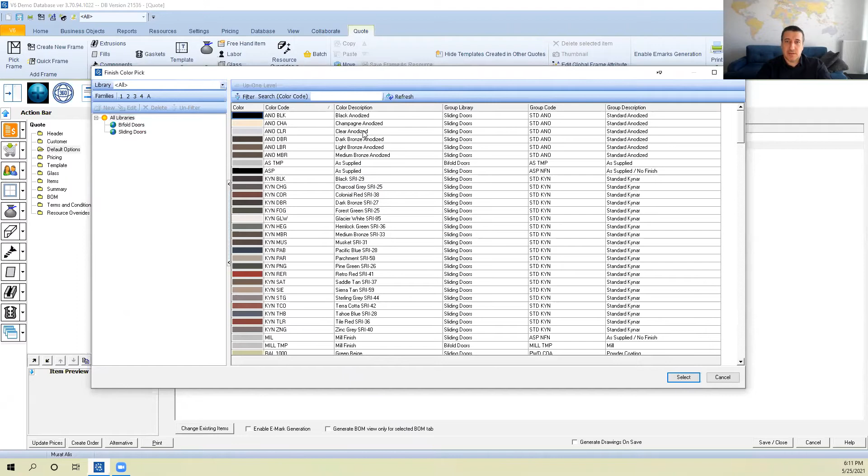I can pick a salesperson from here, within our organization, who is doing that job. We can pick finish options, global finish options for our frames. V6 supports all types of finishes - anodized, clear, champagne, bronze, and some Kynar finishes, all the powder coating options with the actual colors. When you pick those finishes, it will affect your actual pricing as well, not only visually.

And the same way, we can also pick a glass, and we have our own glass library with different glass thickness. You can build your own library in V6.

I'm going to start with the actual sliding door here. These macros are shortcuts to add quickly elevations, so I'm going to add an elevation. It's going to be a 4-panel elevation, overall 135, and I want to put a screen. This is the suggested configuration for that item. I click OK, and it's going to build dynamically that elevation.

So this is my elevation. You can see the price automatically calculated at quote time with the default options picked, and I can change those options. I can configure my door again with different track types, different head track, different seal track, different style and top rail, and so on.

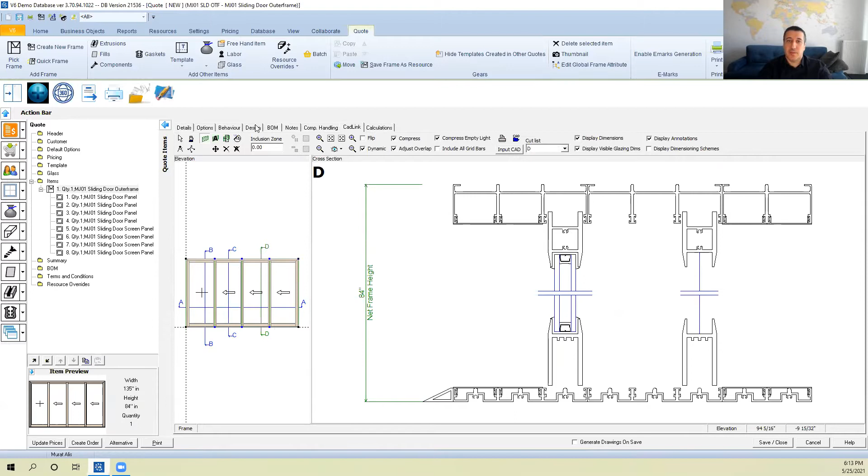Then I can show you the bill of material. This is the list of all the extrusions used in that item. We have the length, cut angles, quantities, and also finish and part numbers. This is the vendor that I need to buy the profiles from. Then a list of components - we have just 3 test components here, with the actual quantities. This cost and price we can hide if you don't want to show.

And this is the glass. You can see there's only one size of glass, and the reason is the system is set up to be automatically equal glass size. So even if you change the width or height of the frame, the glass size will remain unique within all those panels.

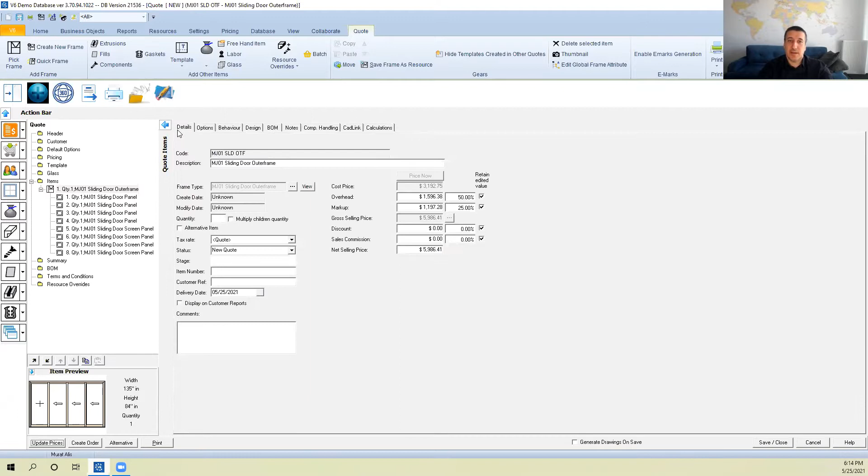Now this is my elevation, and you can see this is the price being 5,986. If you change here and do 145, dynamically the model will update and the price will become over 6,000 now.

And if I do a 3D view, you can see that actually this is the presentation of that - the actual profiles in there.

Now, if I want to do a change on this, I can click this button and say the top rail - I want to move that one to make it a bit bigger. And I want to do the same thing for the fixed top rail, the bigger ones. If I click OK, you can see right now the picture updated, and we have the bigger top rails here.

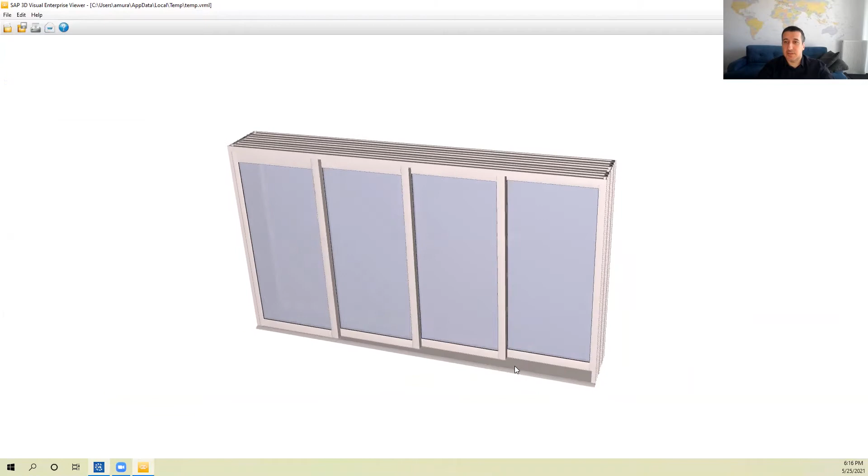And actually, the price got updated slightly. The bill of material automatically updated, and also the 3D view will have now the bigger top rail here - you can see that. So the important thing to note here, Murad, is anytime we make changes in real time, it's calculated and captured by the software engine to update in real time, correct? Exactly.

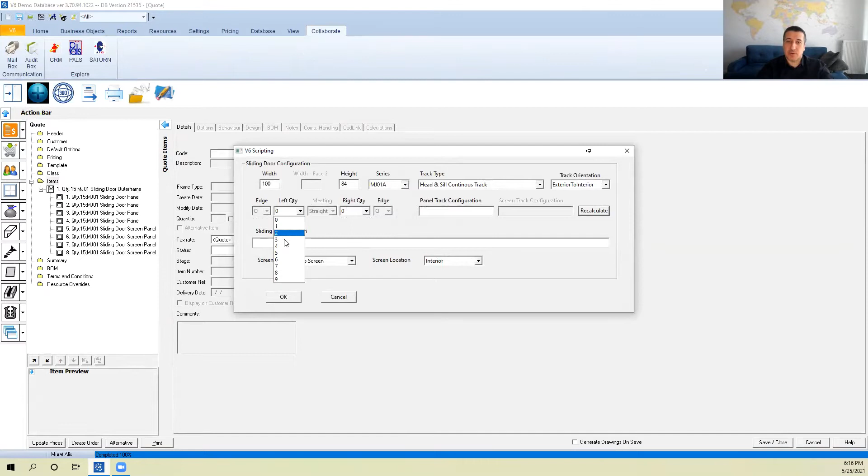And now let me add, we can put some volume to this. Let's say this quantity will be 15. I want to add another one, so I click this button. This time I will do a corner item, let's say it's going to be 3 by 3 and 90-degree corner.

90 and maybe 100, a different size here. And I can put a screen again, maybe a slim screen this time. So this is my configuration, so I click OK.

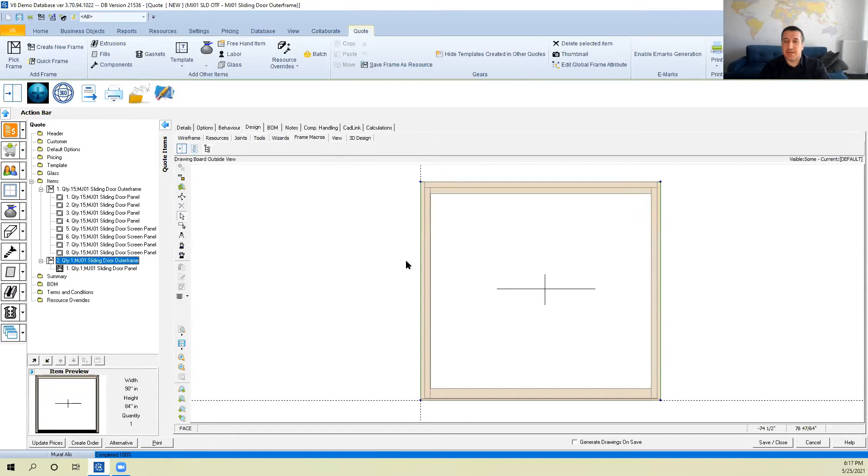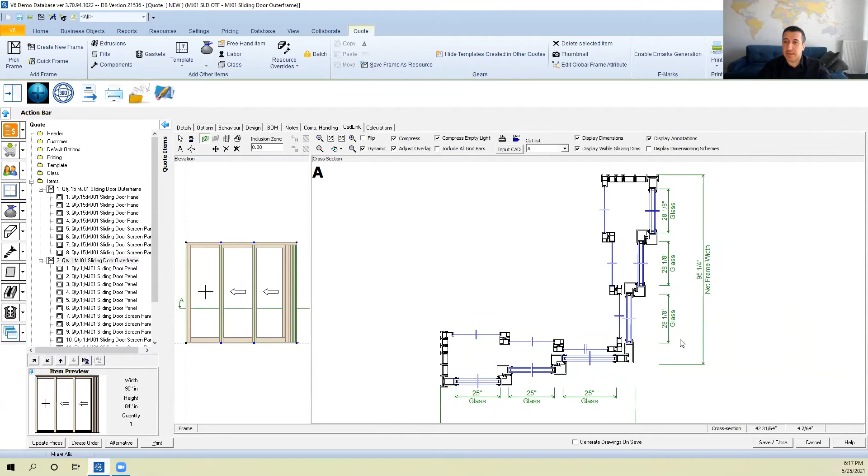And this time it will be, and we can understand better, like it's 3D now because it will be the actual corner. So it will do a small model of that building, of that frame. If I show you that, the rotated view, this is what we have. And if I do a cut, you can see that. This is how things are coming together. And again, it's equal glass automatically in each face.

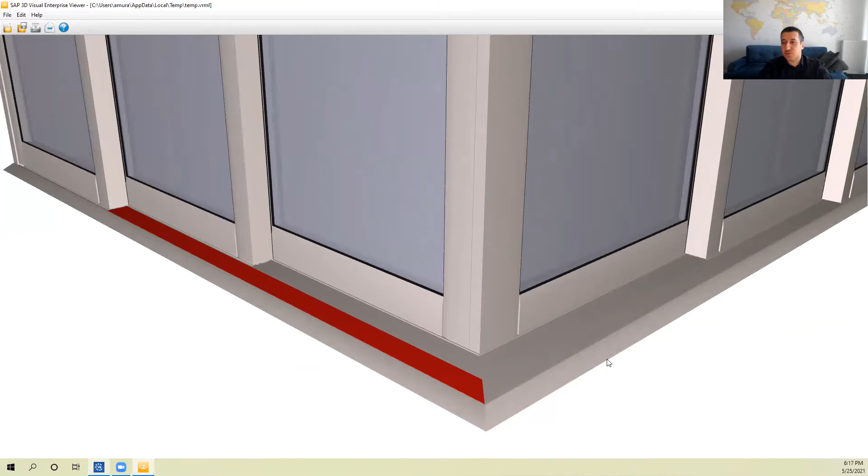And if I show you the 3D view, you will see that the V6 engine is quite smart. It has a formula and drawing engine embedded together. So what it does here is actually it's saying, okay, we have a corner, the cap here needs to be mitered, so automatically it makes that miter.

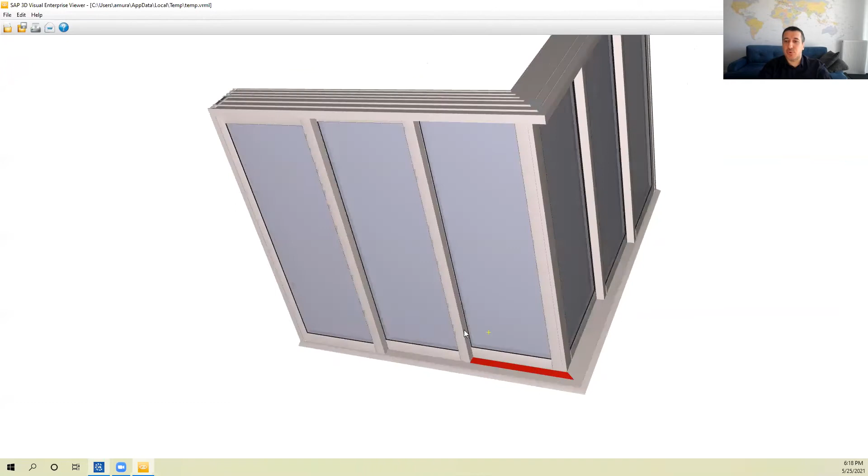And in that, it only uses the cap on the area that we need. So the cap is stopping at that edge, so it's actually achieving a step cap. Normally, you would do a lot of manual work to achieve this, but everything in V6 on that database is automatic. So you get that, and also we can see a live cross section.

If I move that up, we can see how things are coming together. That's a real model of that elevation. So that was just the 2 items, and I'm going to give a quantity of 6 on this one. So this is a corner item.

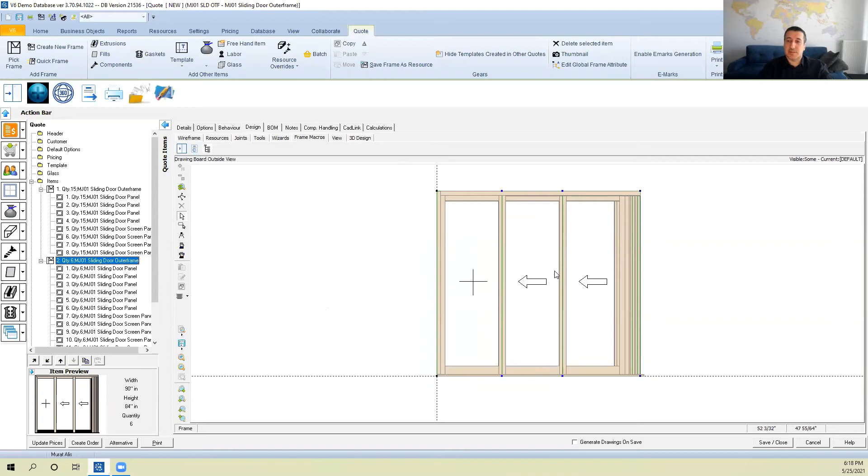Now, if I add another one, and this time we'll add a bifold, you will see a different configurator for the bifold. All it asked was how many to the left and right, but that was it. And again, it's equal panel. We have the overall width.

Now, as an estimator, one thing important is that when you configure this one, you need to be making sure that it's a valid one. So we don't want to give our customer, a prospect, a quote which is not making sense, and which is not actually approved in engineering validation.

So I'm going to change this size to be 165. So far it didn't fail. Let's make it 175. Yeah, now you can see there was an exclamation mark here. And if I bring my mouse, it says the maximum allowed width is 40 inches, and actually my panel width is 42 inches. So it's warning me that there is something wrong here.

And we can have different user level access. We can tell that if you're a power user, you can override this, or you can assign to an engineer to check it and approve. There are multiple ways of proceeding after that point. But V6 will always mark that with that exclamation mark.

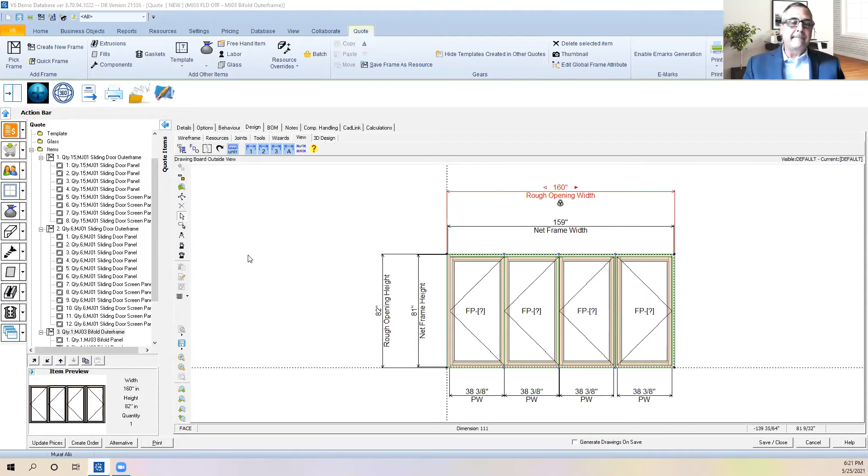Exactly. And this is a 3+1 configuration, and easily you can go. And if I show you the cross section again, you can see this is how it looks like with the hardware. And if I go and change back that to 2+2, you will see that the elevation view updated, as well as the cross section here at the middle. So this is all dynamically done by the system.

Hey Murat, we got our first question that's real pertinent. It says, if you have multiple product series that use the same configuration, how easy is it to change the complete product series either per line item or per complete order?

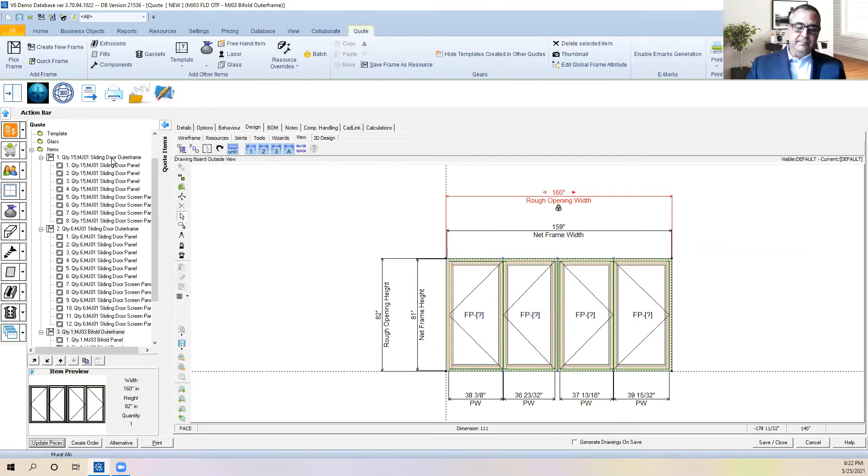Can you go back? Yeah, the way it will be done probably is you will have a system type.

Here we have a series, MJ01A. If you check that, it has a cut like this. So if I go back here and change this option type, I'm gonna change that to...

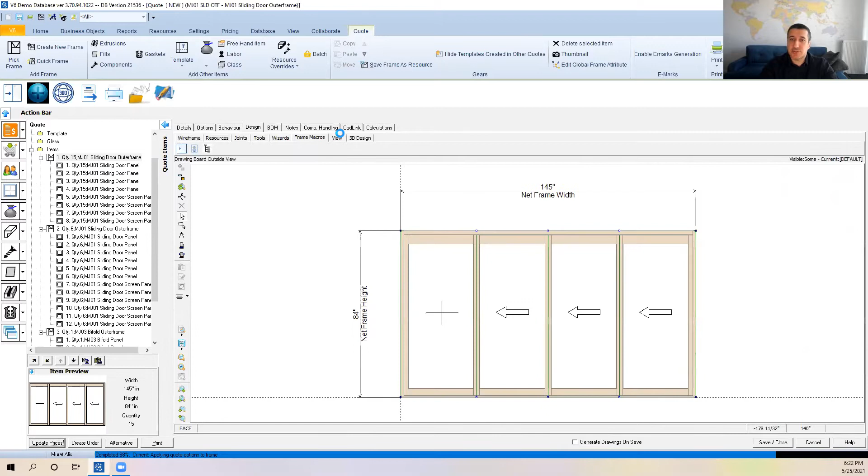B. So it automatically changed my head and sill track to B. And actually the detail here is changed, and it becomes a different profile there.

That can be achieved by just adding an attribute and making it compatible, or you can use the native feature to completely keep the frame types separate, and then you just change the full product type from one to the other, and the design will remain as it is, only the bill of material will update. So there are multiple ways of achieving that within the system.

Awesome, thank you. Sure. And if I go back to the bill of material, one thing we also support is if you have pictures for the hardware, you can add them and they will show up here. So in the bill of material outputs, we can see those pictures printed.

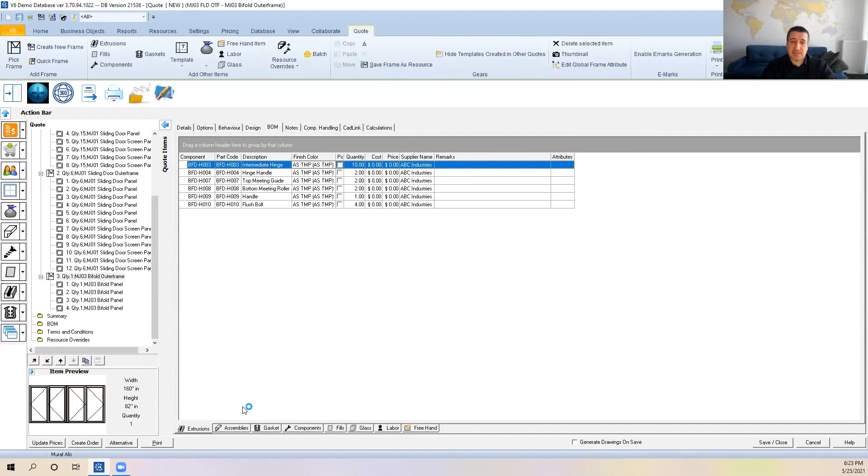As I shown, that is also possible to do with the extrusions. So that's the summary of how we create a job in V6. We can see here the total cost—135,000 is the final price.

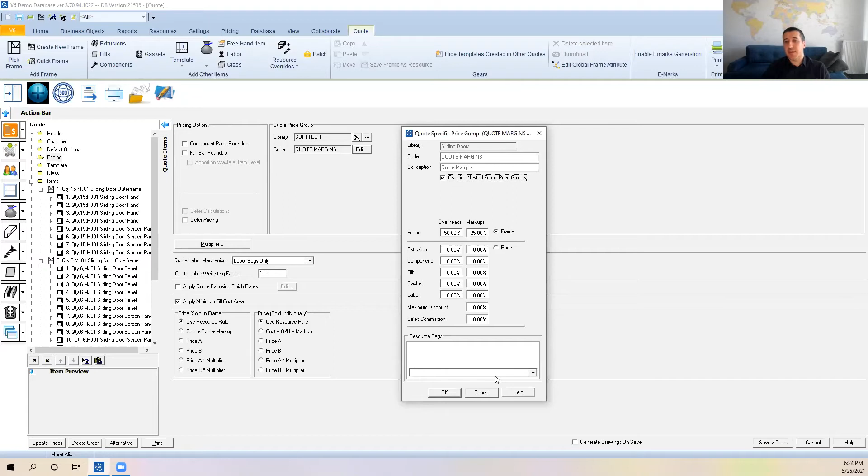We can set up our margins here. That model is cost plus markup. You can see 50%, 25% here, and accordingly it is calculating, based on this cost and overhead markup, the final price, okay?

So now when you're happy with this job, you will just save this. Right now I didn't attach any status to this, so you can see here there's no status. Actually, I could say that this was just a new quote and save it.

V6 supports that status, and when you integrate with a lot of software, you could use those statuses to do some actions.

So if I go here, you can see I have folders for all the new jobs—anything in revision, lost, order material, pre-production, in production. You can see a couple of different folders there, and you can actually see what's going on within the factory, where a particular job is.

Ideally, you need to integrate with an ERP system, and automatically those statuses are updated by the right people.

So if I just open one of the jobs here, this is an existing job, so it becomes an order. You can come here and change that from new quote to production, and just release the paperwork for the production.

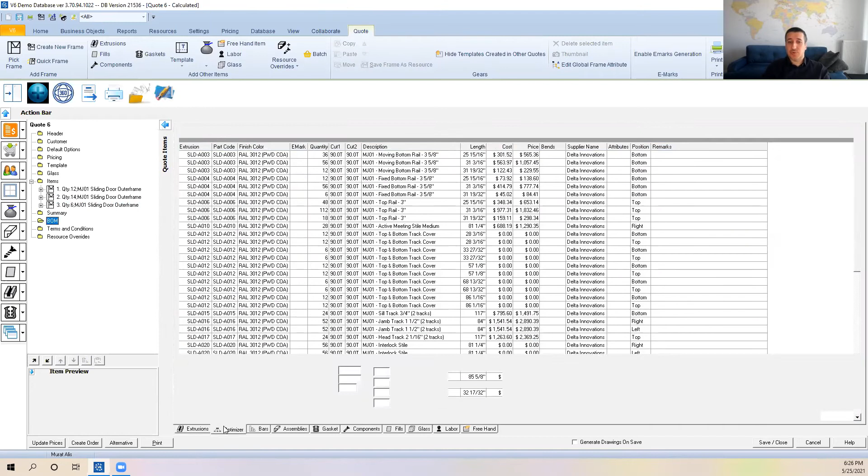Right now, in all those profiles, we have a stock length edit, and typically it's 1, but just to show you the power of V6, I added a bit more than 1. So if I open one of the extrusion resources, you can see in this one we have 120, 60, 98, 240, and 256 inches—so between 3 to 6 meters, different stock lengths are there.

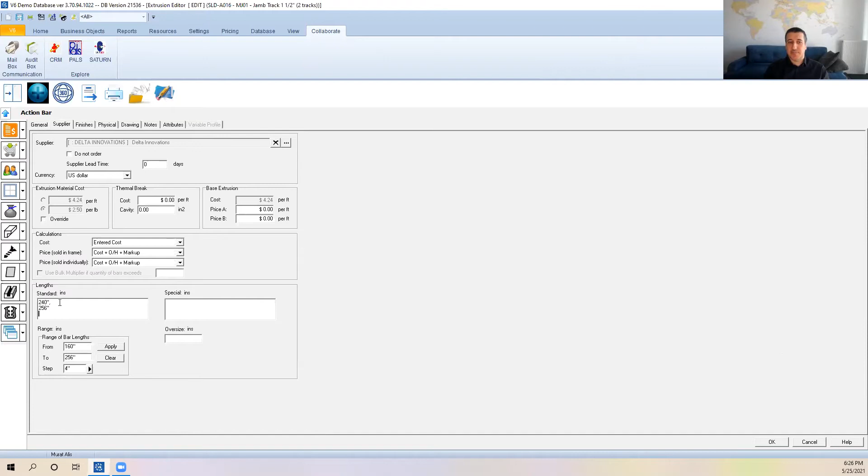What it will do is when I say optimize per standard length, it will pick the best length out of those to optimize. So it's just doing the optimization.

And if I go to the bars, you can see for SLD A03, it suggested to use 20 pieces of 160 inches. For this one, 9 bars with 256, and so on. So this will help you reduce the wastage.

But actually, our system supports custom length as well. So what it will do, between 160 and 256 inches, between 3 to 6 meters, I'm just saying each and every 100 millimeters, about 4 inches approximately, it will check all the lengths and find the best length for each.

So I click that optimize button. Now it's actually doing optimization with all the different lengths from 160 to 256, and for each profile it will suggest the optimum length.

You can see the wastage now is within the 1 to 3% range, including the unrecoverable waste as well from the cut thickness and the end trim at the end.

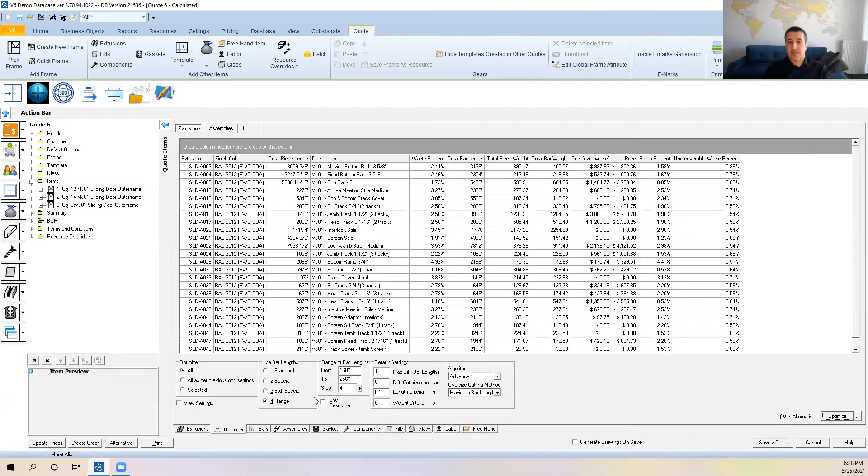So if I go to the list of bars, you can see I need to order 14 pieces of 224, 9 pieces of 256 from this profile. All of them have different bar lengths. So that's how we do the optimization.

Now I save this job, and then I will print a quote report out of this one. So here again, we have shortcuts to print reports. I click this button.

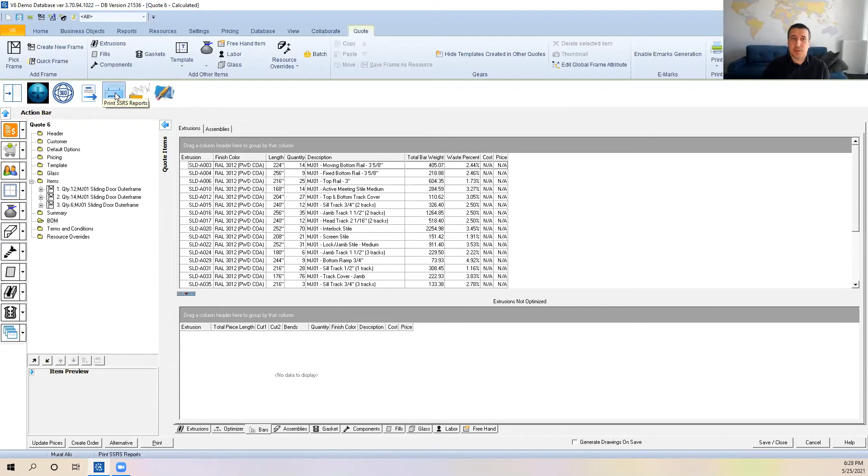So it is bringing this screen to print reports. What I want to print is the quote report. You can print multiple reports as well, and this is customizable. You can have as many category and as many reports as you like. So this is going to be a quote report. I say print selected, and then it will print that report.

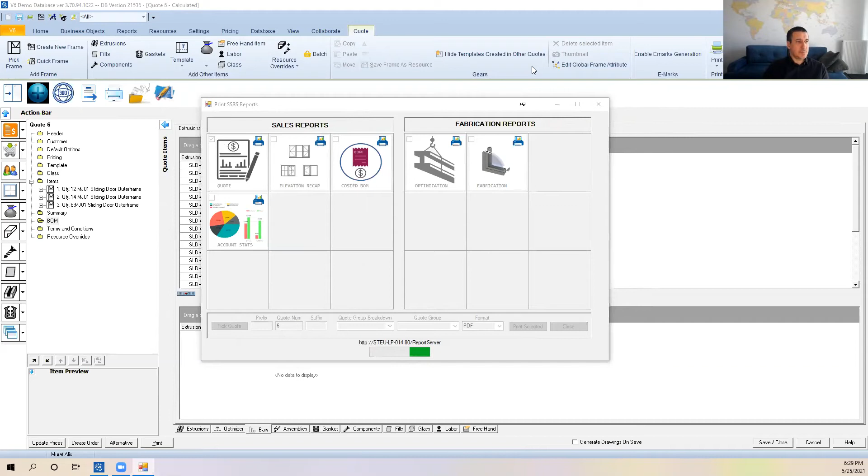Sorry, Murat, I've been answering questions. We're getting a lot of questions. I've been able to handle them myself and not bother you. So, sure, this is here now.

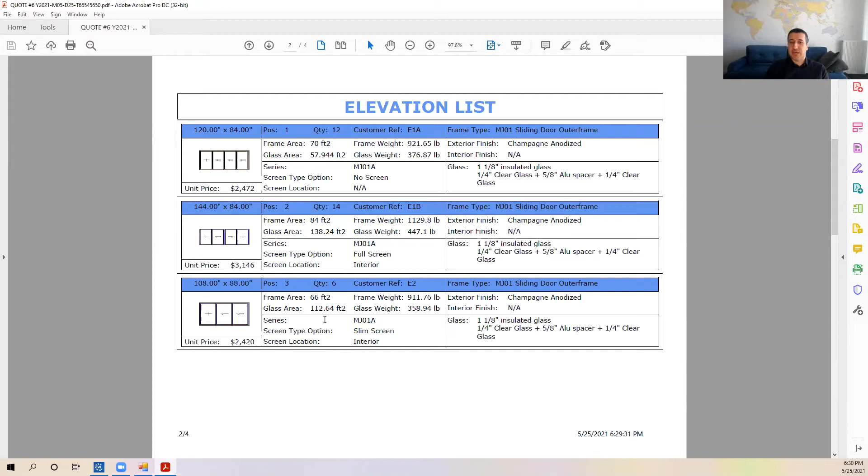Also, you can put as many options as you want to show to your customer. Here, I limited it to 3 options to show: whether there's a screen or not, and which system type I used as a subseries. Then the next page, we have...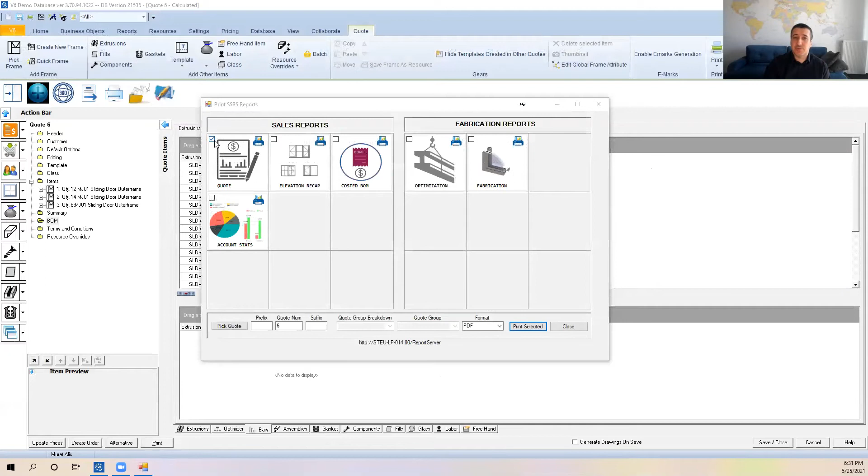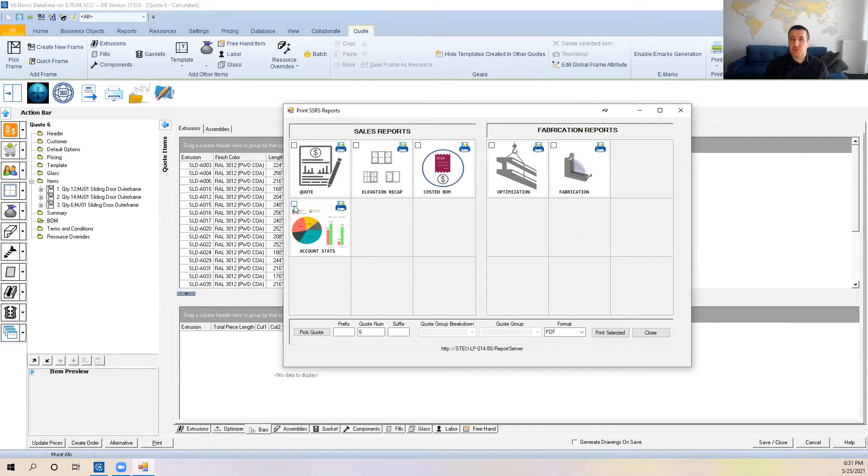Now, another thing I will show, before going to the fabrication part, is the sales statistics. This is just one example again, and we can have as many as we want. Actually, what I do here is not particularly for this job, I just say within all the jobs, just give me account stats. So if I click this print button, it is again printing the report. It's ready, so you can see the stats here.

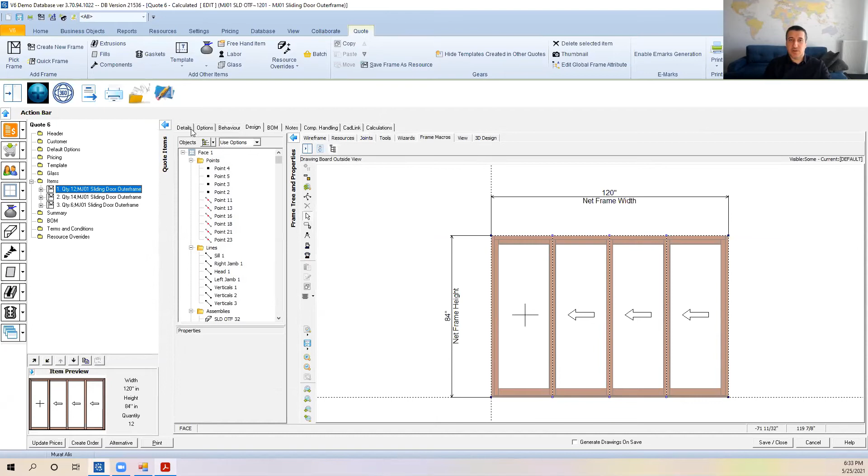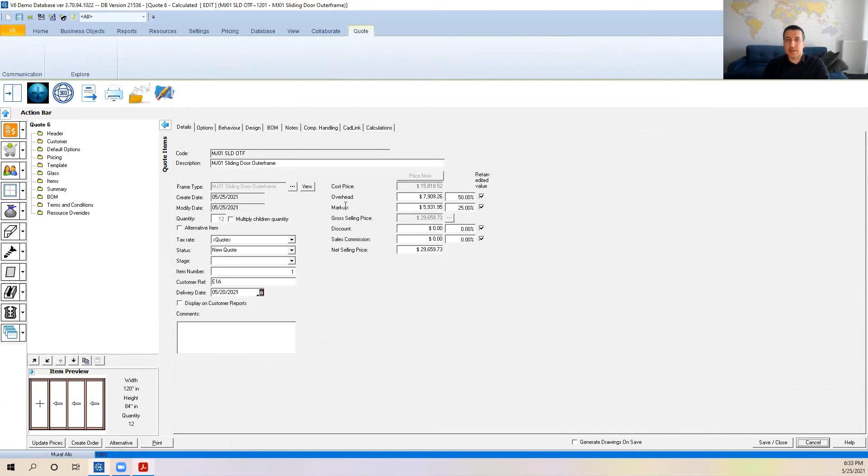So what I will do, I will increase the quantities a lot here to make quite a large job. I'm going to close this. Yeah, this is in production, so you can see it's not allowing me to change. So what I will do is, let me just open one of these.

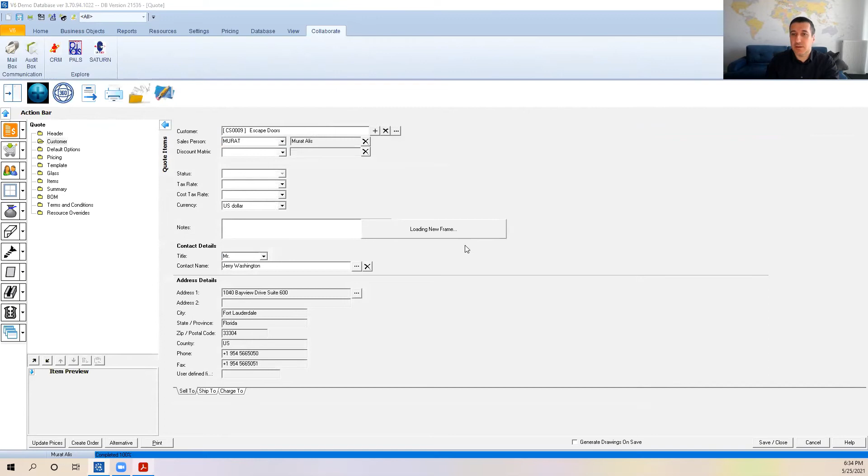I will create a new one, calling it test job, and I will just add one item on this. This is escape doors. And the sales contact name and salesperson is me. Adding 5 panel, and I'm going to make the quantity 200 on this one. We wish that we have those type of jobs, of course.

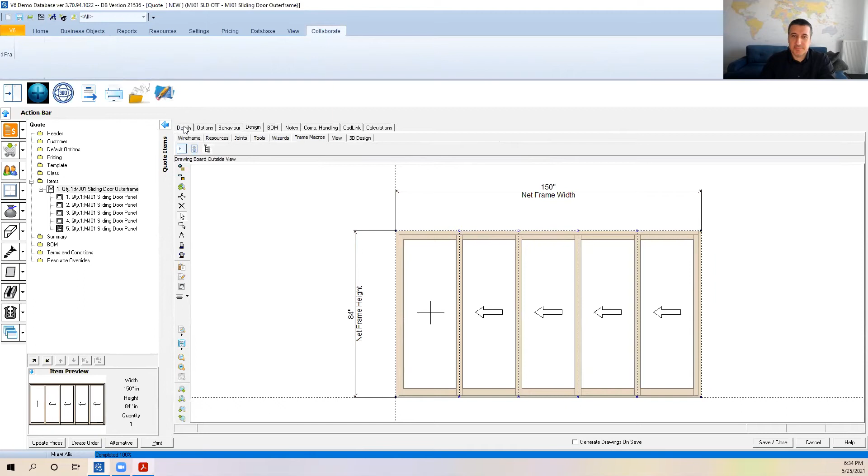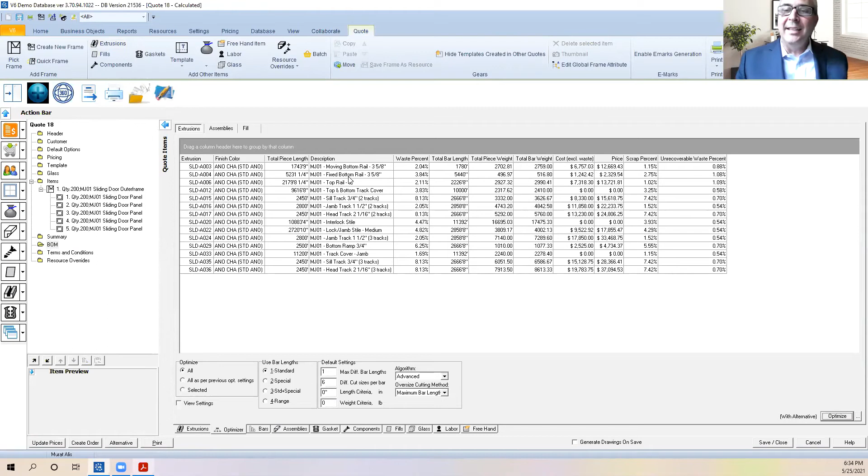One little small note, just to mention while Murat's doing that, probably something you take for granted, is this system floats back and forth seamlessly between imperial and metric. So you can enter something in metric and it will display in imperial and vice versa. So for anybody living outside the United States that deals with metric... I'll print the selected, just the summary.

So that was about this. Now, if I go back to the report outputs, what I showed you was a print macro to print the reports. This is what we call custom macro screen. We could have your company logo here, a different design, and a completely different interface.

So if I print another one, which is this button, you can see there's a different design, and this is a bit simpler. There's no graphic. You can pick what report you want to print and then get the list out of it. Just wanted to show you the difference between them.

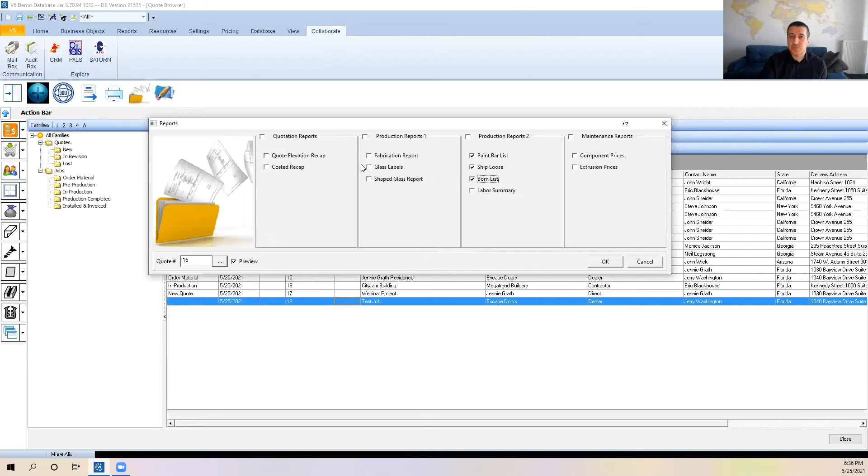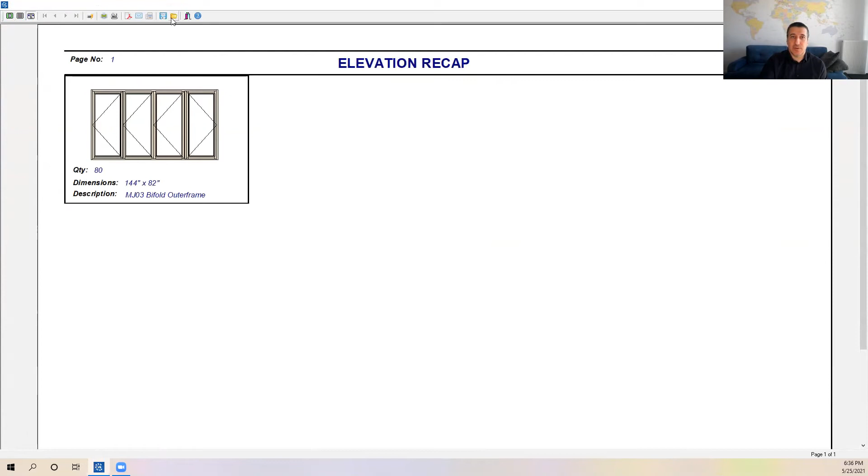So if I just pick a job here, number 16, and say I want to print these reports, you will see a different type of reports getting printed. This is the recap with all the elevations showing together.

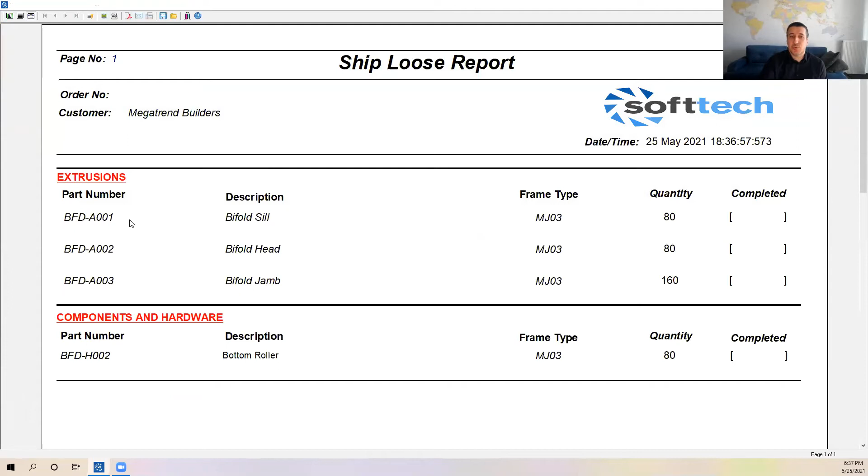This is the cost analysis. This is the bar, the paint bar list with all the bar quantities. And this is the ship loose report with the items that need to be shipped together with the frames. And this is the complete bill of material with the cost if it is there.

I can also show that in another system with the cost tag, and you can see the glass cost is added here. So that's what I can print from this different print button.

I can also show you the shop drawing output, so here I click that. What it's doing is actually creating a PDF output and DWG output in a folder. And when it's over, it will give us a message that it's done. Yeah, you can see, and the file name.

As a user, you can either send that PDF to your customer, or if you want to use it on the shop, you can use it. But also you have the DWG output that you can use to add more details to your shop drawing.

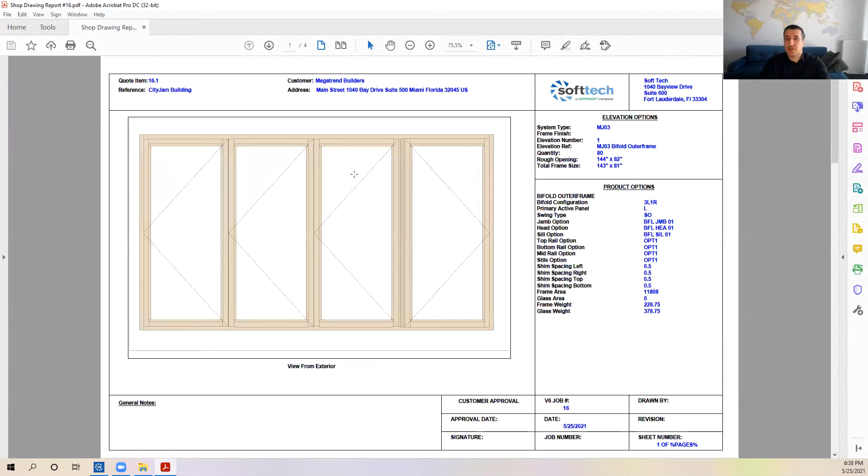So this is the elevation view with the options about this elevation. Then we have the list of extrusions, hardware and glass. You can see this is the list of extrusion, hardware, if I zoom, and the glass.

And in the next page, we will see a horizontal cut. And in the next page, we will see a vertical cut. Again, dynamically, as many cuts as you have, it will show them all there. So that's an example of that.

And then finally, I will show you the optimization output, and this will take like about a minute. So Jim, if you have any questions that you want to cover, you can cover now.

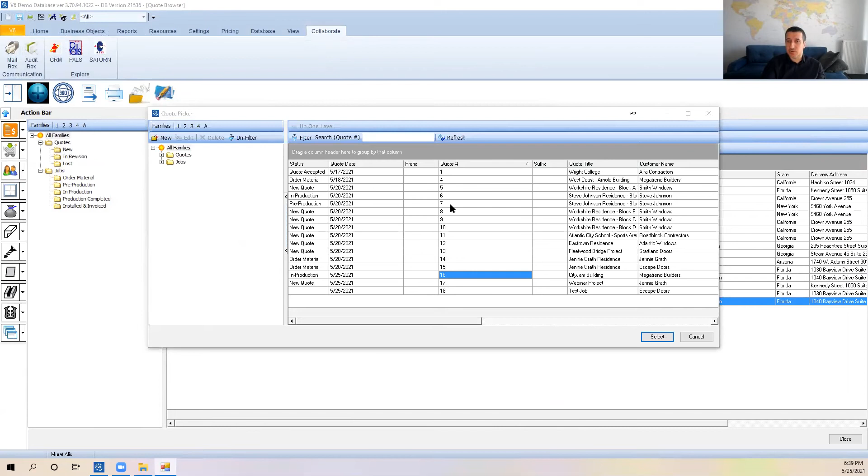No, I mean, we've had some really good interactions. There's been a lot of questions I've tried to answer mostly on my own. One of them, I'm not sure. I don't know how we're running on time. I don't know if you could get to it today.

I suggested something more intimate, but the question was: Murat, can V6 automatically configure performance requirements, thus substituting out BOMs to meet the performance requirements? So in essence, let's say you build something to meet a certain thermal property, but then you change the size, and you need to still meet that same thermal property. Will V6 change out the pieces and parts, knowing that thermal property is the most critical part, or a structural part, maybe it needs to be a commercial rating, whatever it is.

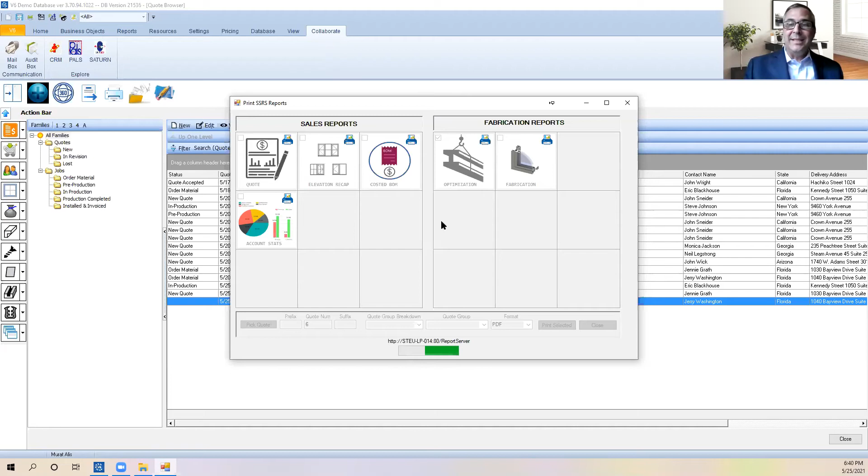And my answer was yes. I don't know if we have time to demonstrate that today. That's all. Yeah, sure, the answer will be yes. And that will require some formula substitutions, and as per the parameters, we can do it. We can do it based on any criteria. We can actually dynamically change the plots.

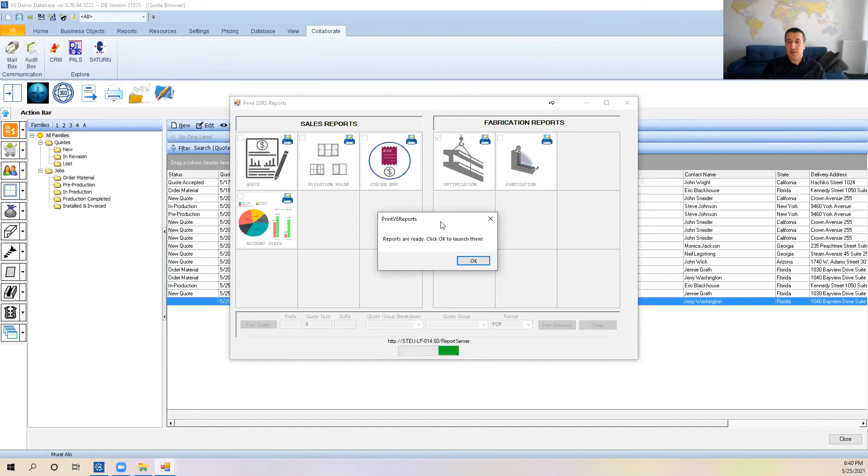So we have the report ready. That's an optimization report actually showing the job name. So what we need to do is we have 12 bars from this profile. The bar length is 224 inches. The waste is 2.32%, and that's the length of the waste. And how do I need to cut that 224?

What I need to do is 6 pieces of 25.94 and 2 pieces of 31.59 inches, cut with 90-degree angles. It also tells in which position those are going, so we can see their positions, and accordingly know which piece goes where. We can also print labels with barcodes, and have another report attached to this one, so you know exactly which piece goes to which frame, which elevation, and how you're going to manufacture. So all that is available within the system.

I think that is including the initial part of this database. Also, we recently released another build, which is a 3.8 version. That's a newer version with a slight difference in the interface, and I'd like to show you that we are continuously making changes to our features to make it more user friendly. So I think it will be good to show you that database.

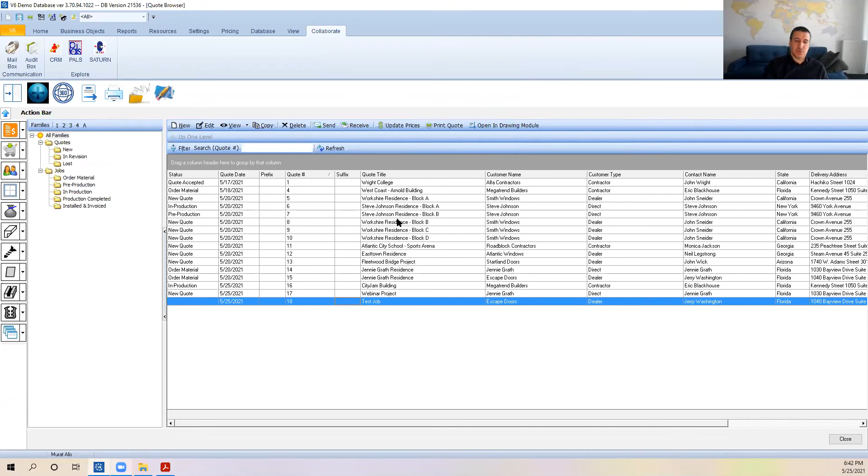Can you produce a labor report and just talk briefly about how that's done? I had two different questions from two different people about that. I don't have a labor report on this database, so I'm going to open another one and show you. This is our demo database, we didn't build labor on it, but I'll show you that right after.

Basically, I had two questions in a row: does it take into account labor? And the answer is absolutely yes. It gets very detailed into labor when you provide exactly how much time it takes to do every little function in producing a unit. Whether that's screwing in 4 screws in a door hinge, or how much time it takes to make a cut on your aluminum, anything you can think of, we can apply a labor rate to.

So I'm opening another database on my other screen just to show you that.

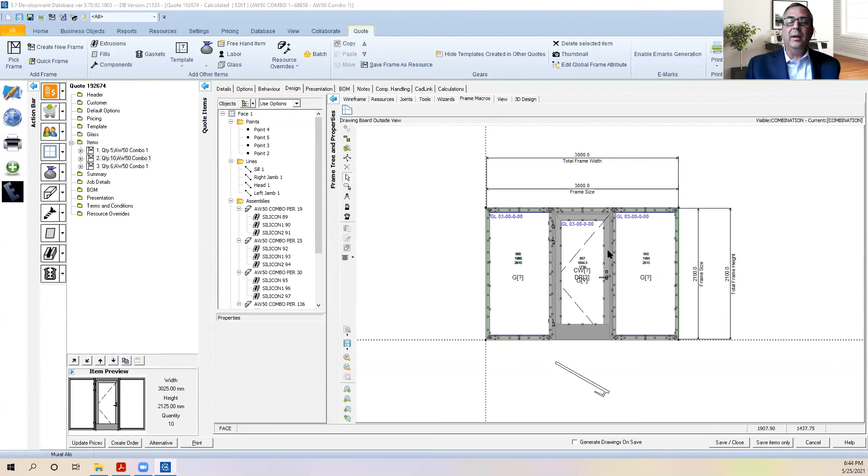Now, what's interesting to note while Murat's doing this is where SoftTech is different: when he opens up another database, that's where we differ from a lot of software manufacturers. The database is your database. You own it, meaning you have the ability to make changes in real time, modifications, deletions, additions, subtractions, as you see fit. We are there to help support you and make changes, but it is your database. It does not belong to us.

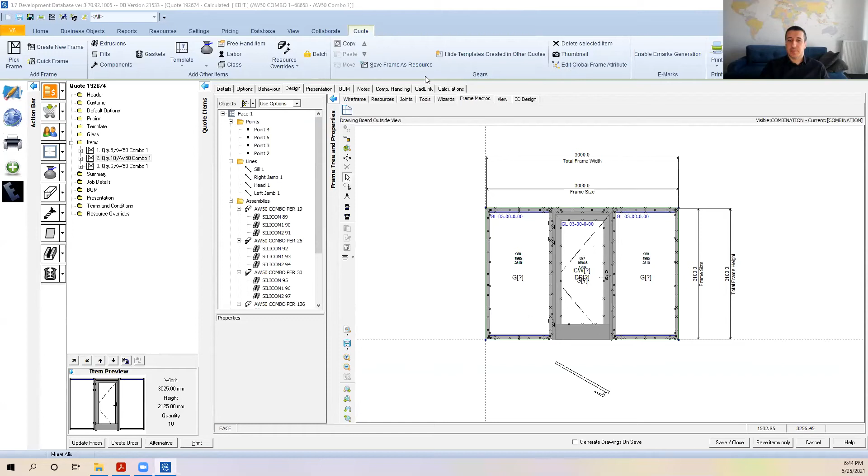So here you can see a door nested in a curtain wall, a different system. If I go to the bill of material and go to labor, you can see it's actually calculating the labor for each item: machining, assembling, glazing clips, installation of gaskets, hinges, mortise lock, cutting of the profiles, all the hours and minutes, with their actual areas.

We also have our scheduling module that we can export that data and link with it to actually optimize and schedule the fabrication of this. In the factory, you can have all your people added in that scheduling module, and they can check in and check out when they do the work. Each of these labor items can be associated with one worker in the factory for capacity planning in the scheduling part. Most importantly, this labor will be reflecting your cost, so your final selling price for that job for your customer will be as accurate as possible.

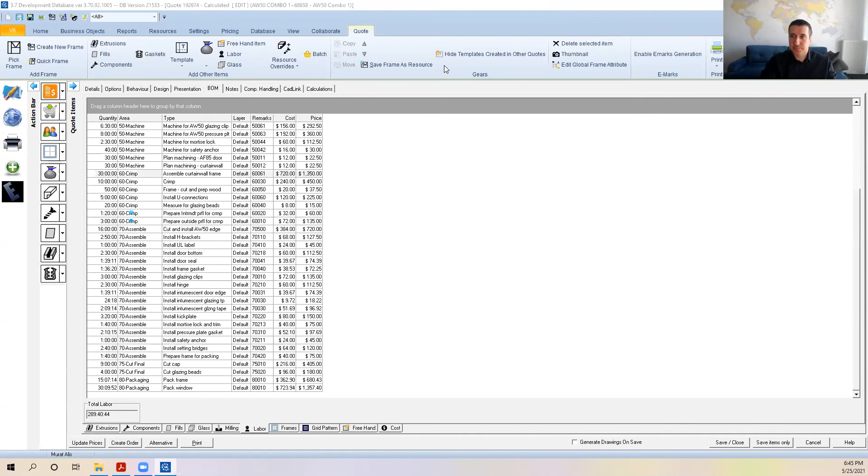So now I will go back to that new version that I was talking about. You can see the interface is quite different, a different look.

What I will do, again, is create a new quote here, and I will pick a frame from the database. This frame, for example, in this case is from a casement window database that I can actually pick a pre-configured item from. So I'm just selecting that, and it is added in the list.

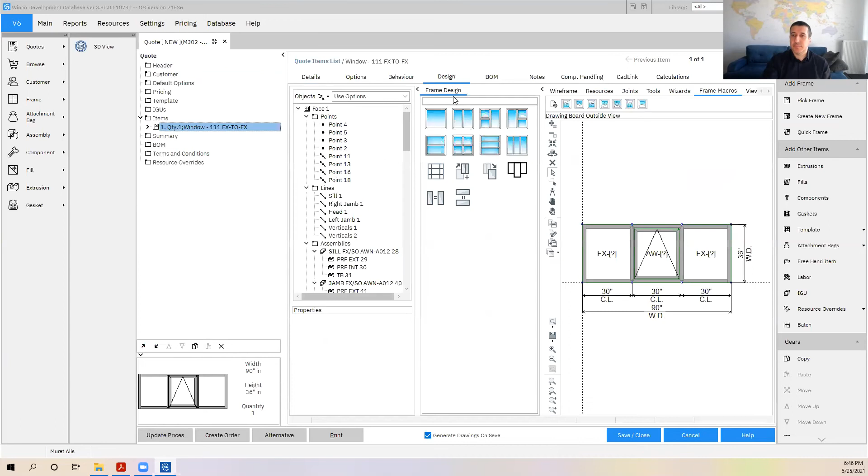So this is my awning fix, a casement system. If I do a cut, you can see how it looks, and it's quite a different design. You can see all the elevations with their thumbnail view here. We have different views, like list view.

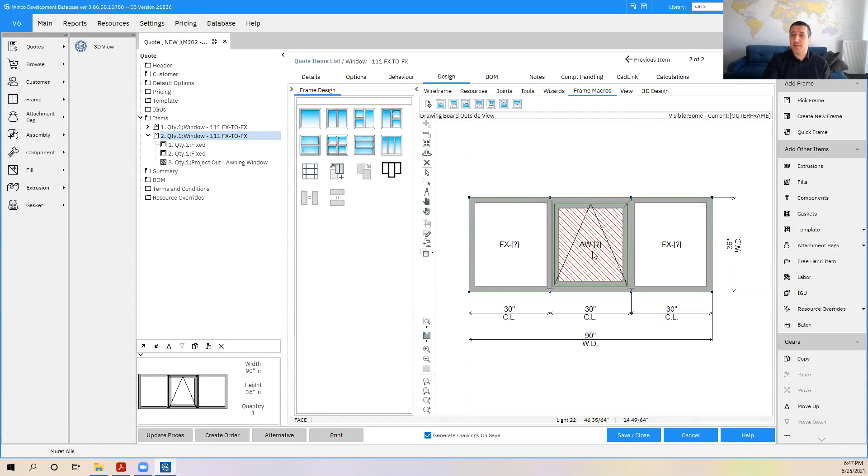If I go back and select this, copy and paste, I just created another elevation. In this one, maybe you don't want an awning, so it's very easy, you click this one and choose a hopper. Also, when I do the cut, this will dynamically update from open-out to open-in, and it's all updated live.

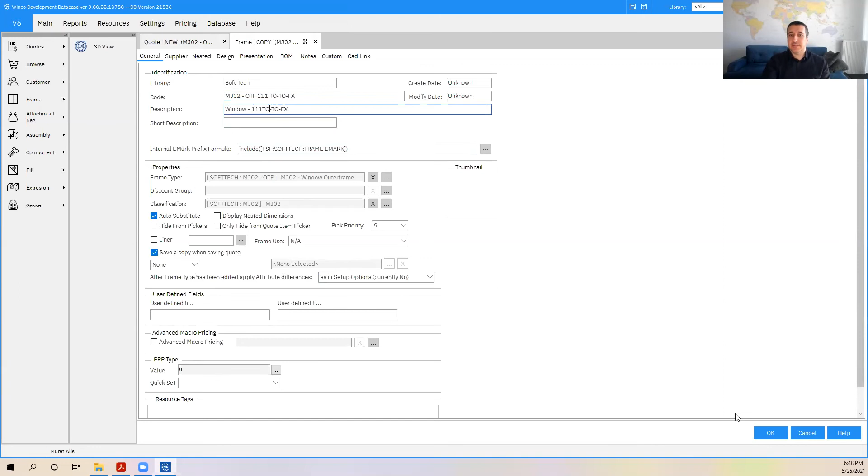If you're happy with this elevation, you can come back here and save that frame as a resource, saving it to the database with a particular name. So next time, in a new job, or when one of your colleagues picks a frame, that new item will also be on the list. That's how you easily build your own library with a lot of pre-configured frames.

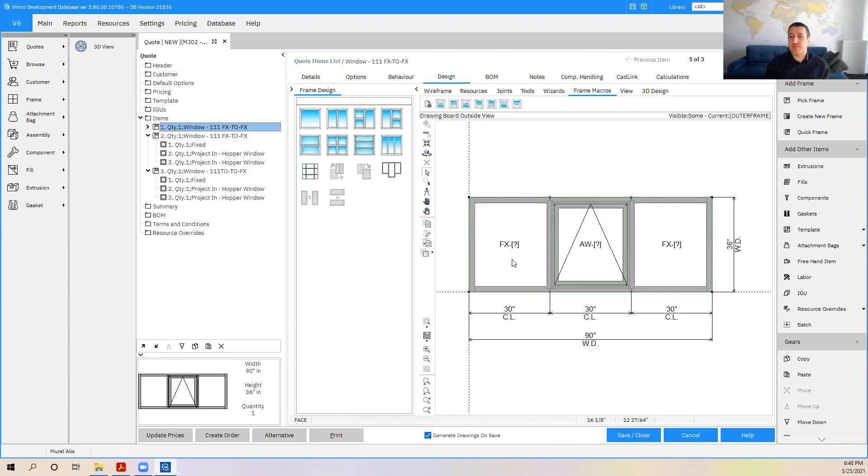Now, another key feature I left here specifically is our EMARK feature, which is quite important for fabrication. You have two elevations here, and you can see this fixed part is the same, but we have two different sashes, and another one almost identical. What I'll do is change this to a different size. You can see it automatically made these equal, but I don't want that, I want to keep this one as 30.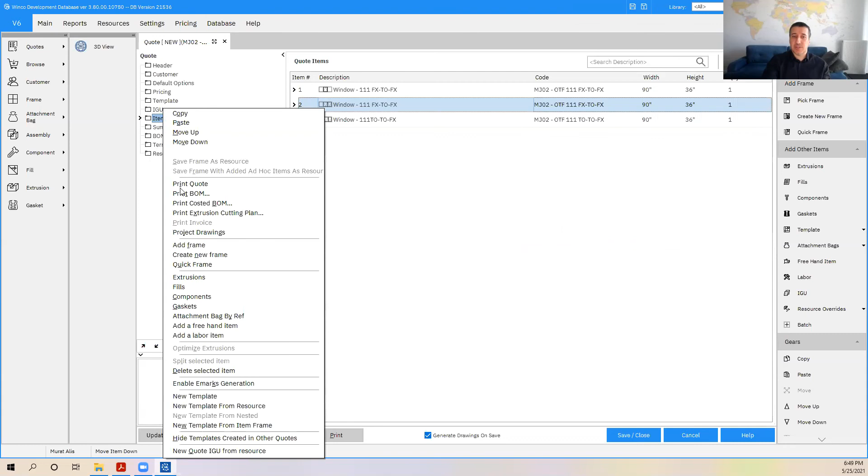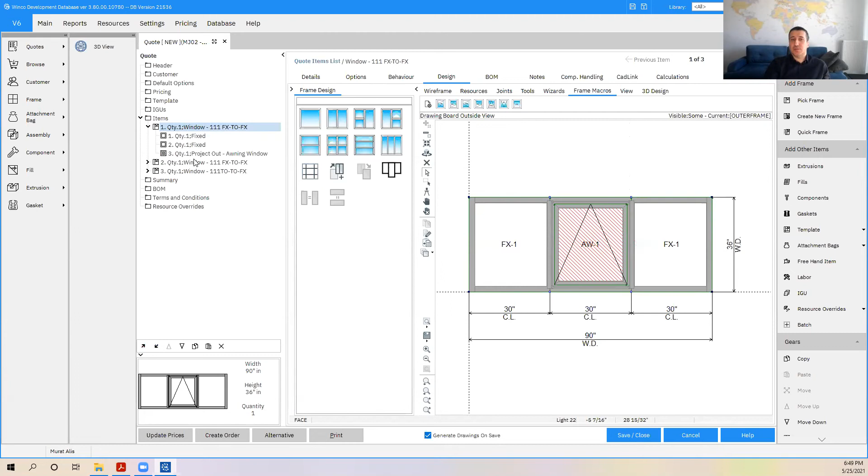So now I will activate what I call EMARK generation. If I go back to our elevations, you can see the system automatically assigns numbers to each frame. We have FX1, these fixed windows are identical. Then we have awning 1. Going to the second one, I have another FX1 because it's the exact same size and bill of material. I have two different hoppers because they're not identical in size, and then I have another 2.

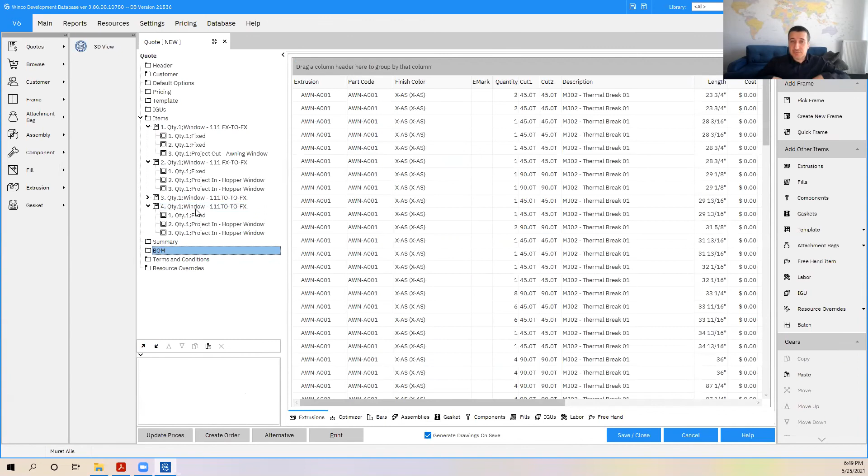If I copy this and create another one, making that fixed window a different size, 33 inches, now if I calculate the bill of material, it will check all the items in that job and reassign the number to FX2, because this is the second fixed window to be fabricated. So that is all dynamic.

So that concludes my presentation. Jim, am I on time? You've got about 5 minutes. I'd like to ask you to do one more thing.

I'd love to show, can you show how that extends into the reports? Because I always felt like the E-marks were great when doing fabrication, having those FX1, HP5, even the glass sometimes. Can you show a report that shows how it's broken down?

Sure, let me check that one second.

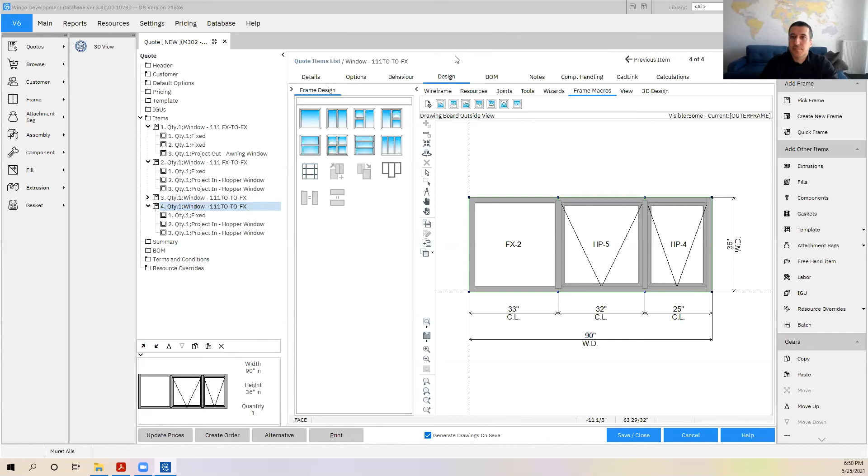The questions have been lively. We've got about 4 more minutes, and then we'll pull up a screen and share an email for contact, and ask if anybody wants to ask any live questions. But I do want Murat to show that one last piece, if you wouldn't mind.

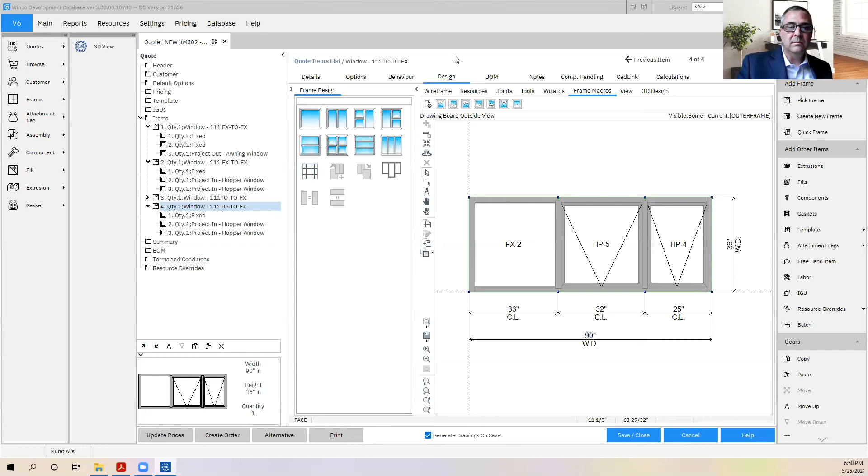Sure, just one second. Again, I'm on my other screen. Anything you ask, we actually like those questions, and we want to do it live rather than just say yeah it's possible, we can do it, but it's better to always show it like how we will do it. So that's what I'm doing right now.

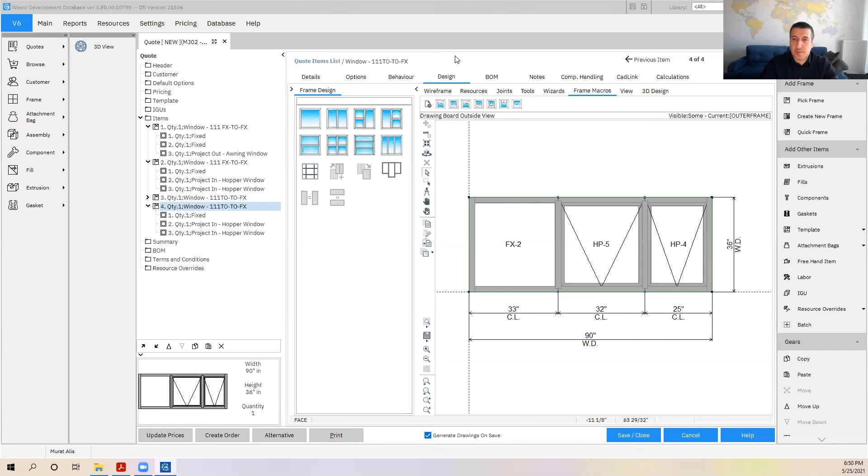So what I did here, I picked an optimization report out of the system. You can see this is metric now, so people who join from a metric region will be liking this, I guess.

So I have one piece of 2057.5, that one has an E-mark for the actual piece of profile. As per the machining, the unique length, every profile which has the same length, same part number, cut angle, and machining, they will have a unique E-mark. So this is what you see here. This one is going to position 1 on that elevation, and it's going to DR1, door 1.

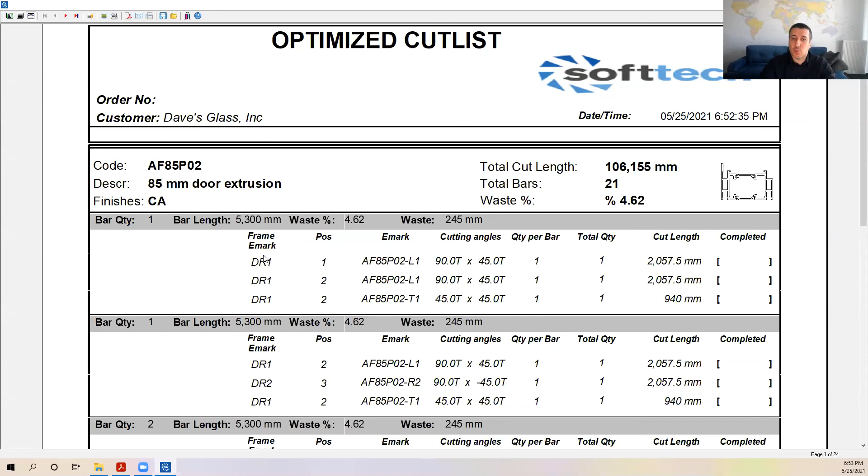So this is a bit more complex. You can see I have 2 same profile sizes, but one of them is going to DR2 and the other is going to DR1. So that way you can actually put pieces together and know which extrusion needs to go in which assembly area, for the panels, doors, windows, all those items.

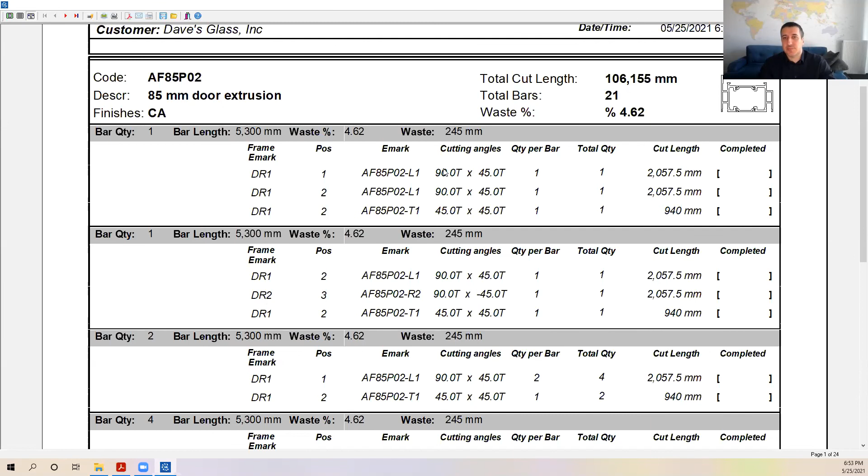So that's a report output for the optimization, which is quite different than the first one I showed, because all those reports are again customizable with your wishes.

No, this is helpful, this is what I wanted to see. It really demonstrates the waste, and it shows the Emarks on what was made per order, where it needs to go, and why you cut what you did.

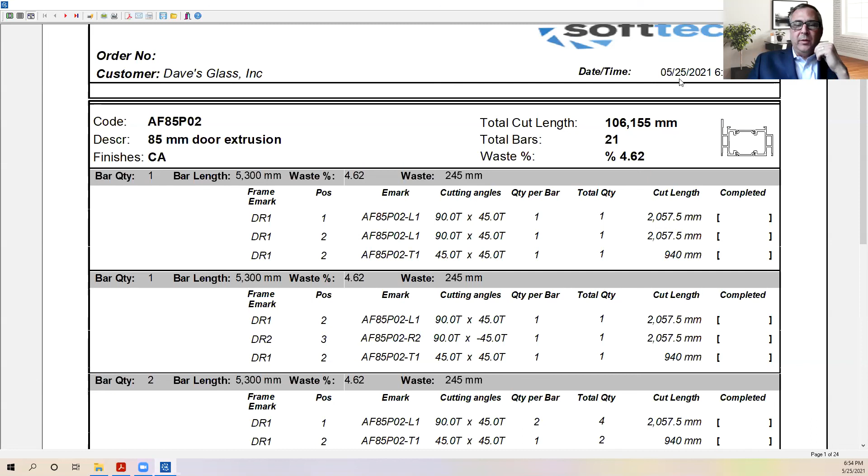Sure, so just verbally I will talk about a few things because we didn't cover them. Normally I can do a live demo to people who are interested, a more private demo. Even V6 is such a huge software that we can do 4 or 5 hours of demo and there will still be things to show you. So in that little allocated time, we wanted to show as much as possible without giving you too much information. And we can do curtain walls, unitized, stick.

We can input wireframe shapes, and also we can export data as 3D. Those are some of the features that we have, and we can tackle them in another presentation if you want.